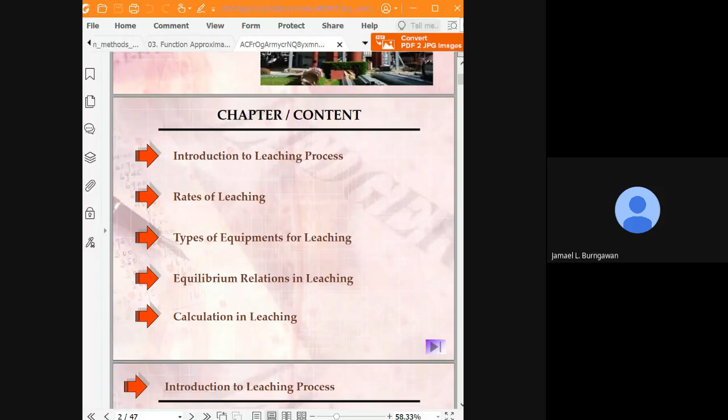Okay. So welcome to the last module for these separation processes natin. No? So as what I've said a while ago, this will be an addition to the previously prepared lectures ko.

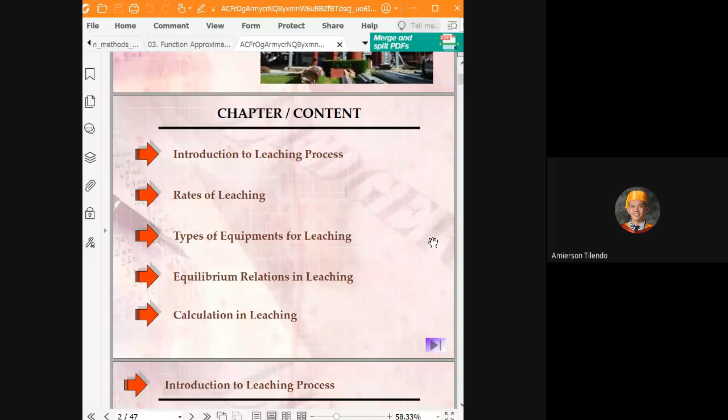So meron tayong liquid-liquid extraction. We also have gas-liquid extraction from the mass transfer natin, which is the absorption. And we have now the solid-liquid extraction, which is also known as leaching. So we will give you an idea on the basics, the fundamentals of the leaching process, the rate of leaching, the type of equipment for leaching, equilibrium relations in leaching, and calculation in leaching.

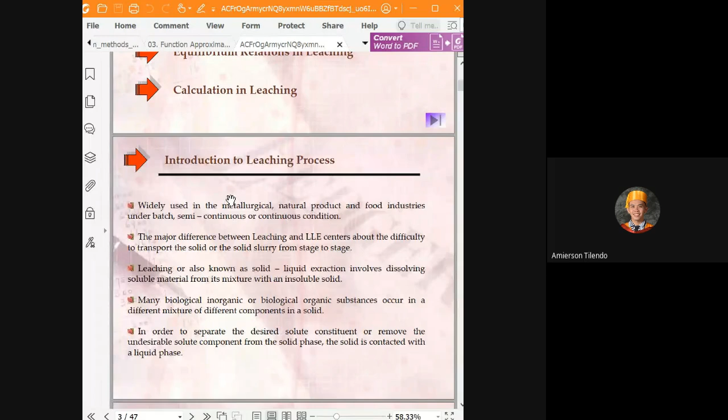So probably the two remaining sessions natin will mostly be covered for the leaching natin before we take our final exam. So it is widely used in metallurgical, natural product, and food industries under batch, semi-continuous, and continuous conditions. So especially most industries na gumagamit ng leaching talaga is the food industries because many products natin, marami tayong products na

I think nawala yung grupo nila. Dito ba yung later pa naman? I think I thought nawala.

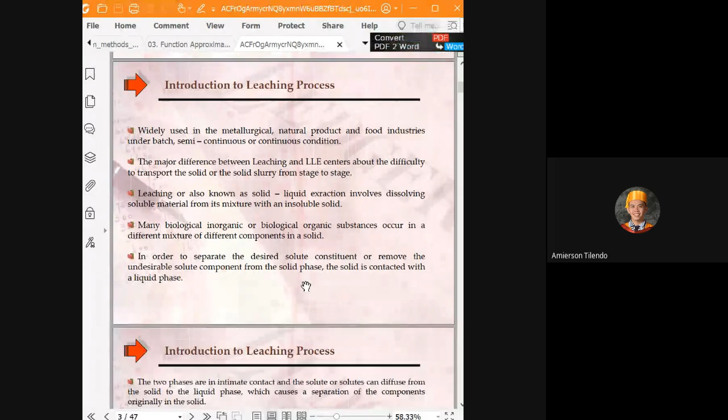Leaching, also known as solid-liquid extraction, involves dissolving soluble material from a mixture with an insoluble solid. So, we have soluble material and the insoluble solid here. Pag sinabi natin soluble material, siya si active component mo, or siya yung gusto mo ipalabas doon sa solid material mo. For example, doon sa tea bag na example natin, yung active component ng tea natin, siya si soluble material kasi solubilize siya sa fresh solvent mo.

Si insoluble material, siya yung matitira doon sa tea bag mo, or siya yung leaves mo na wala ng active component, no? Insoluble, so hindi siya natutunaw na solid. So many biological, inorganic, or organic substances occur in mixtures of different components in a solid. In order to separate the desired solute constituent or remove the undesirable solute component from the solid phase, the solid is contacted with the liquid phase.

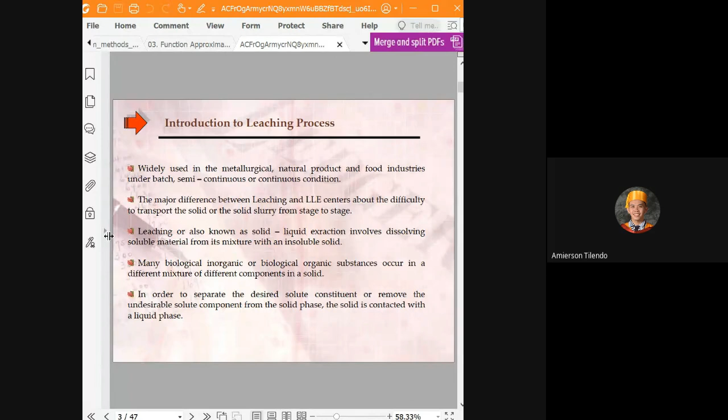So meron tayong example sa leaching process natin if yung soluble material natin is undesirable. So, nili-leach out natin siya papunta sa liquid phase natin. So, two phases are in intimate contact pagdating sa leaching, no? And the solute or solutes can diffuse from the solid to the liquid phase. So, ganito always yung nangyayari pagdating sa leaching, no? From the solid going to the liquid.

Sino yung gumagamit sa inyo ngayon, yung nag-extract ng mga oil sa thesis niya? Or something na nag-extract kayo ng active component from a biological substance? I think meron dito eh. Sige Nash, can you explain nga yung thesis mo?

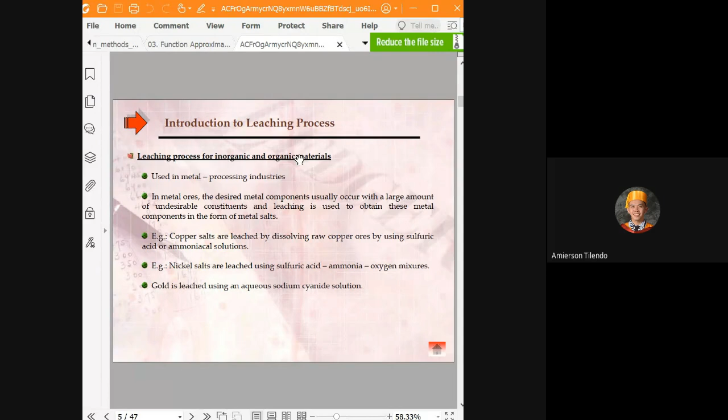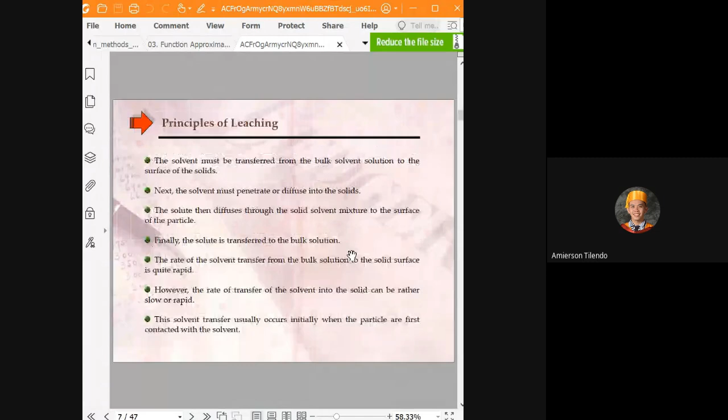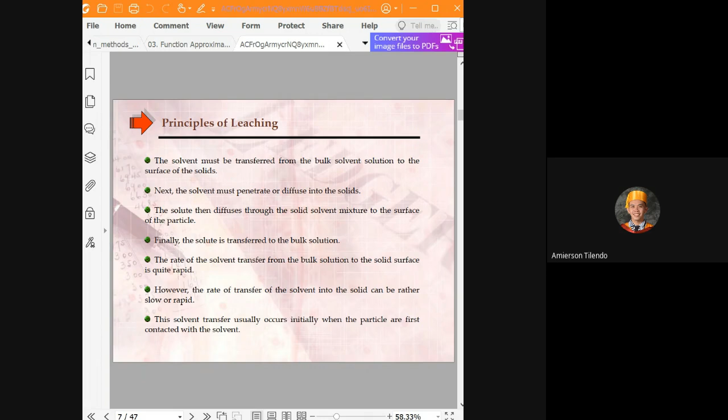And then imagine you have a solvent outside the whole solid. So the first is the solvent is transferred from the bulk solution going to the surface of the solid, which is very fast, especially when your solid is submerged in your liquid solvent. So very fast yun. So we don't really care on the kinetics, or the transport of this first step.

The second step is that the solvent penetrates or diffuses into the solid. So once the solvent is on the surface, it will slowly move into. So ito step number 2, papasok na yung solvent mo, mag-diffuse siya sa loob ng solid mo.

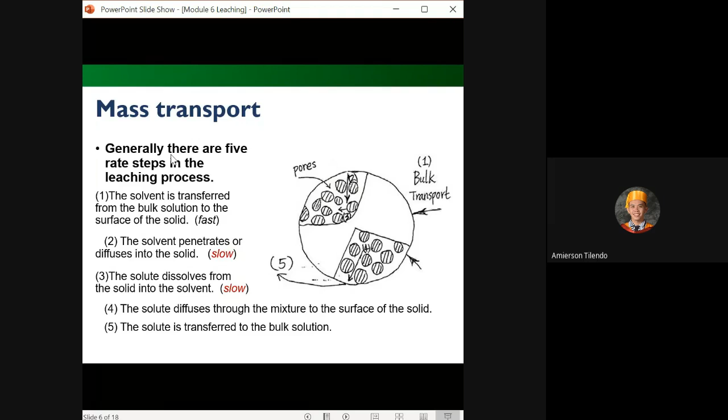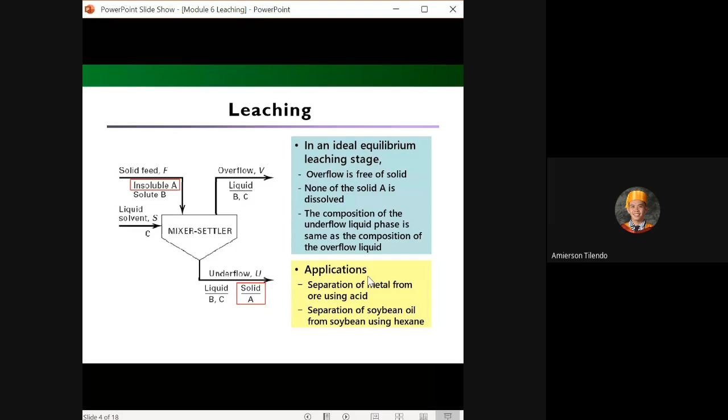You have the solid A, na insoluble. You have the small amount of your C, which is the solvent, and you have your solute B na matitira. So parang mga small amount lang itong si B and C dito. Most probably, sa planta, para siyang pulp na lang dito sa raffinate section sa underflow, or something like a slurry sa underflow natin.

Okay, so generally sa leaching equipment natin we have two types. This is an example of a leaching equipment, so you have an ore column here, and then pinapapump mo ngayon si this is a cyanide solution, and then you have different carbon columns na lalabas dito.

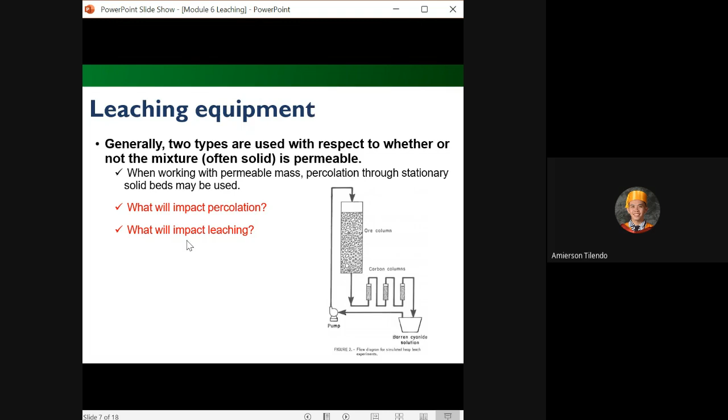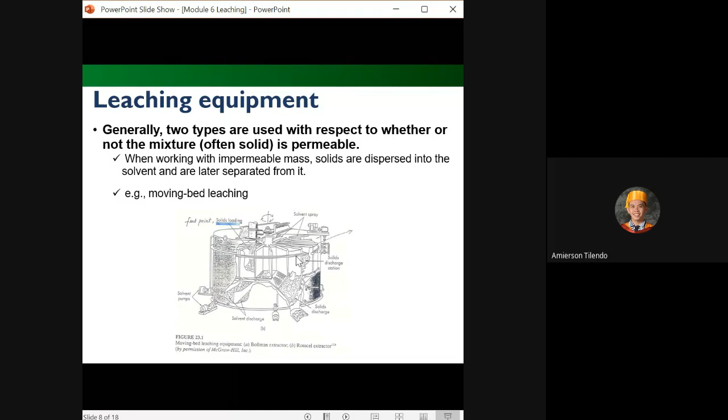This is also an equipment pagdating sa leaching natin, also called the moving bed na leaching natin. So ito is nagro-rotate lang si each of the parang bed natin dito. I think mas maganda yung explanation sa isang slides. Okay, so I'm gonna transfer to the another slides.

So yung mga resistances natin doon sa pag-penetrate and then pag-diffuse outside are very slow, no? So that's why yung leaching takes time talaga. Kailangan pinaparotate muna natin siya, minimix natin muna siya, so on and so forth.

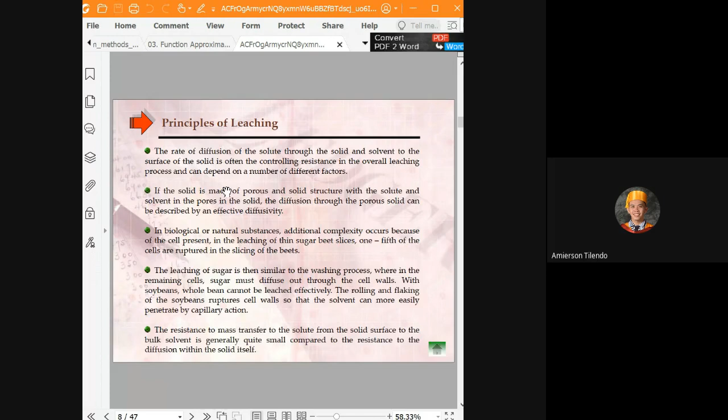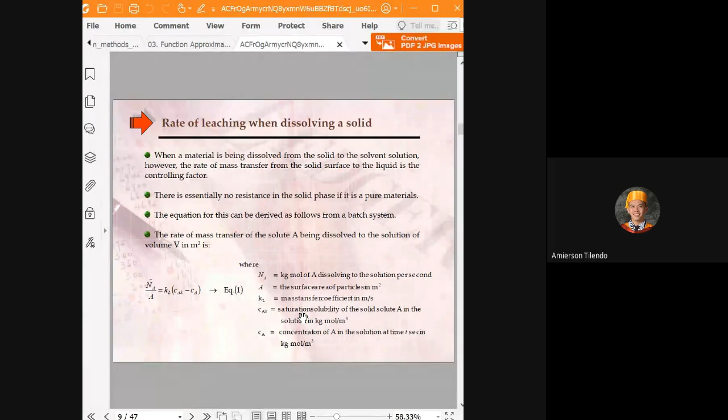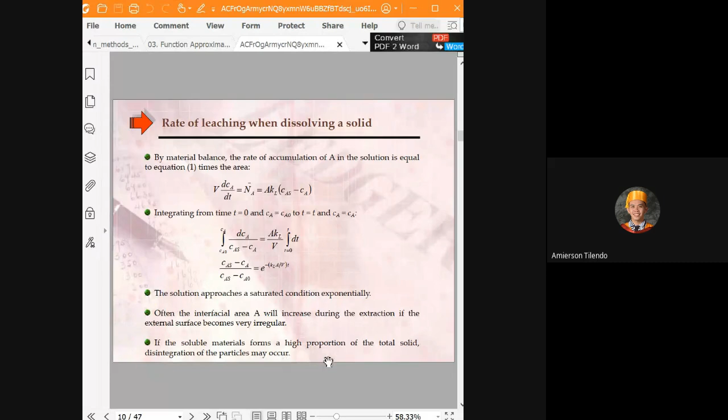So often the interfacial area A here will increase due to the extraction, as the external surface becomes irregular. But most probably our Ca here is constant. So if the soluble materials form a high proportion of the total solid, disintegration of the particles may occur.

So assuming the diffusion in the solid is controlling, that means it's the slowest step. Always, when we say controlling factor or something like this is diffusion controlled process, it means the diffusion is the slowest step. So our controlling step is always the slowest step.

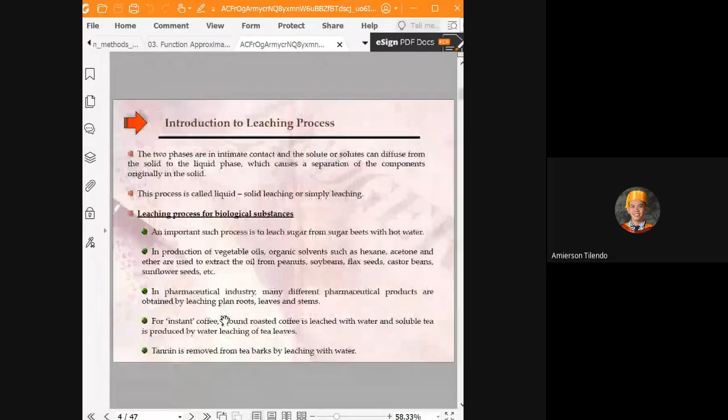And the effective diffusivity is constant. Calculate the time of leaching if the particle is to reduce to 1.5 millimeter. So as with the principle of leaching, once your solute has leached out, the area here often decreases. What I'm saying is that once you've leached out, the area of your solid really decreases.

Let's just say, how do we do this? Let's go back to our tea barks. Once the active component has leached out, since the solute is from the solid itself going to the solvent, your solid shrinks in terms of its area or its volume too. So here, from 2 millimeter going to 1.5 millimeter for our solid, because we are leaching out our solute A.

So for 80% extraction, the fraction here of the unextracted is just 0.2. That means this is the fraction of the solute left remaining in your solid.

So using Figure 5.3-13, I think this is, if I'm not mistaken, in the Geankoplis. Let me find it first. Let's find this table, Figure 5.3-13. So if we have an unextracted fraction of 0.2, the value of the effective diffusivity, T all over A squared, is equal to 0.112, where DAEF is the effective diffusivity, T is our time, and A is the radius in millimeters.

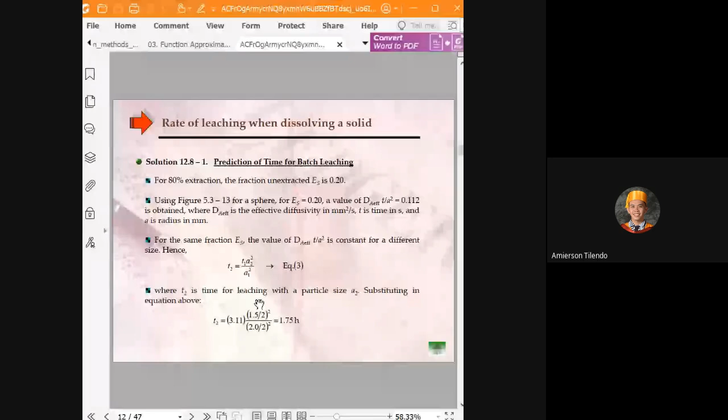Okay, so you need 1.75 hours for the time to leach out or decrease the size into this area, or this radius of 1.5 millimeter. So the 3.11 hours is just a...

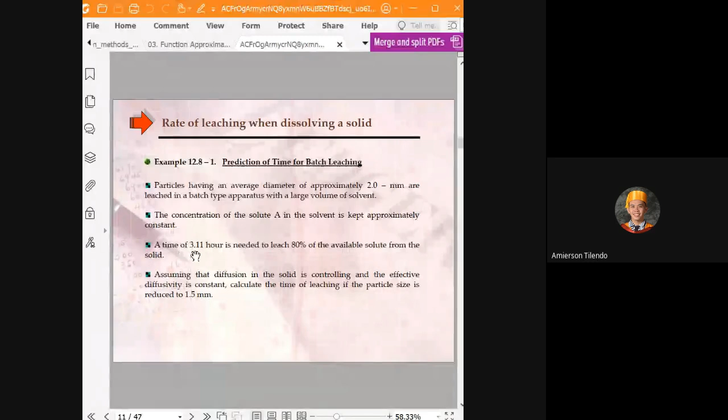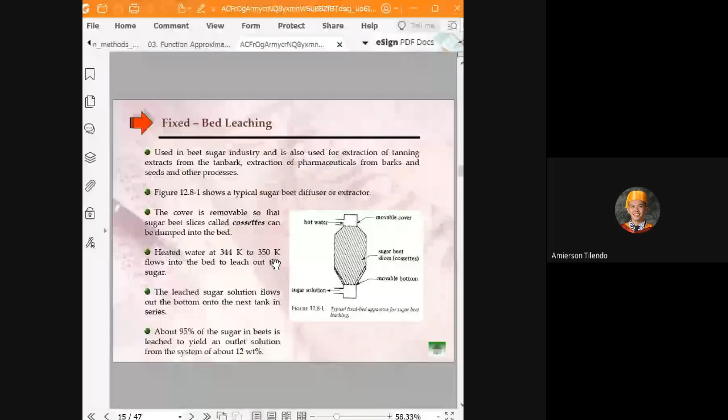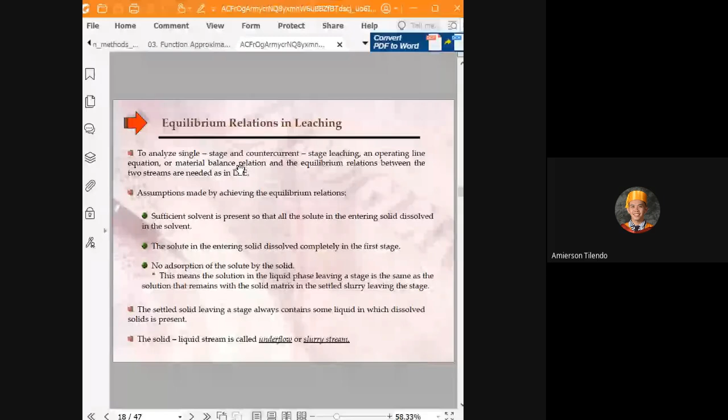We need to know the equilibrium relationships in leaching. So first is to analyze the single stage and countercurrent stage leaching, an operating line equation or material balance relation, and the equilibrium relations between two streams are needed, such as in liquid-liquid extraction.

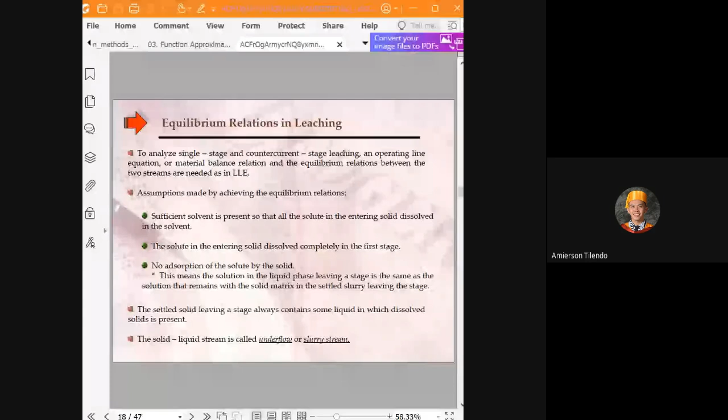As always, our discussion on leaching is just similar to what I discussed in CHE 132. Let me just find it. I'm going to stop presenting and share the entire window.

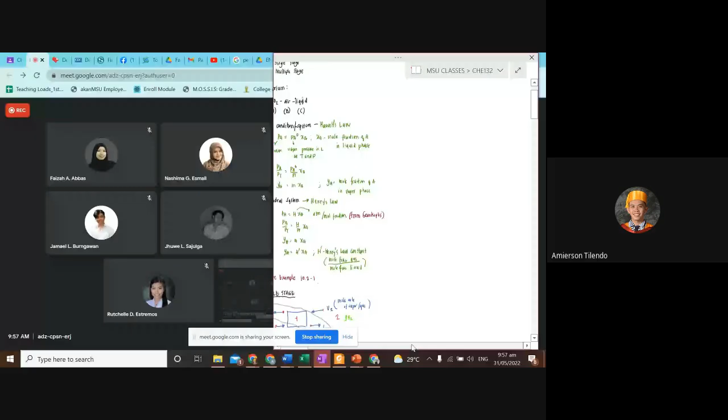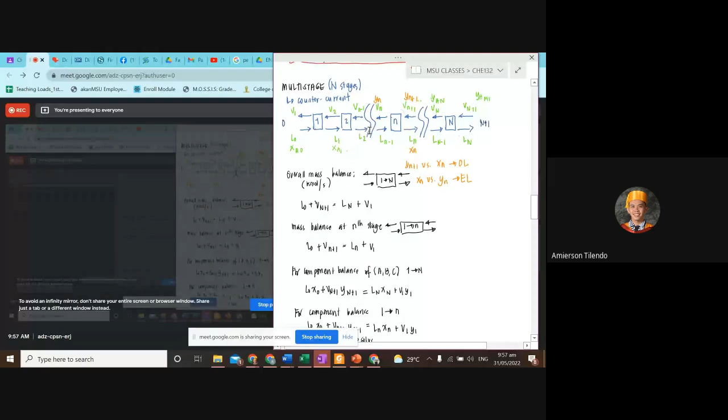Okay, can you still remember our discussion on multi-stage? This is in 132. Remember our discussion that if you have a multi-stage process, we have to find the equilibrium line and the operating line.

So here, for example, we have the underflow L0 going to LN, and the overflow from Vn plus 1 going to V. If we denote small n as the arbitrary number of the stages in between, and capital N as the total number of multi-stages of the cells, the overall mass balance from cell 1 to capital N is equal to L0 plus VN plus 1 coming in, and the leaving is V1 and Ln.

So when we do mass balance, we have a mass balance like this, and we also do the component balance. So we will have an operating line, which is always the relationship between yn plus 1 and xn.

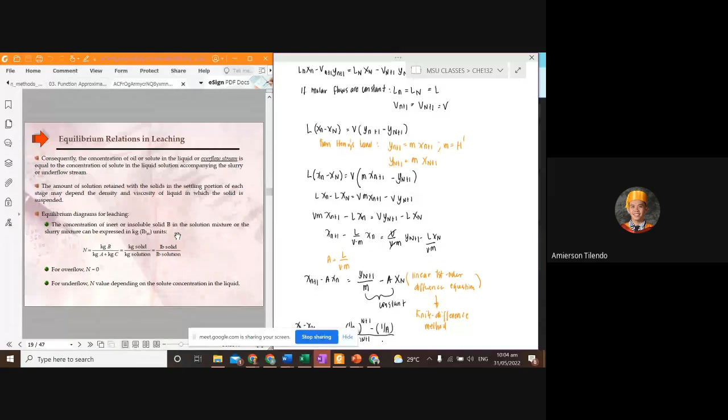So first we have to identify mga notations natin dito. Pag sinabi natin A, for the sake of these slides, siya si solute natin or siya si active component natin or siya yung pinapa-leach natin, solute. A is the solute, B is the insoluble solid, siya yung matitira sa slurry mo, and then C is the solvent.

So the concentration of the inert or insoluble solid B in the solution or in the mixture can be expressed in this notation. So usually N is the concentration. Pagdating sa multiple references naman, nagkakaiba-iba lang din ng notation. So N here is denoted as the concentration, that's kilogram solid over kilogram solution. So yung solid natin is kilogram B, all over kilogram A plus kilogram C of the solution. So take note lang nito.

Sa overflow natin, wala tayong solid na nakikita sa overflow natin, therefore N is equal to 0. For the underflow, N value depends on the solute concentration in the liquid. Kasi at each stage, nag-vary ka ngayon ng kilogram A mo. Nag-vary si kilogram A mo, therefore you have a variation of your N din. So ayun, na-define natin si N.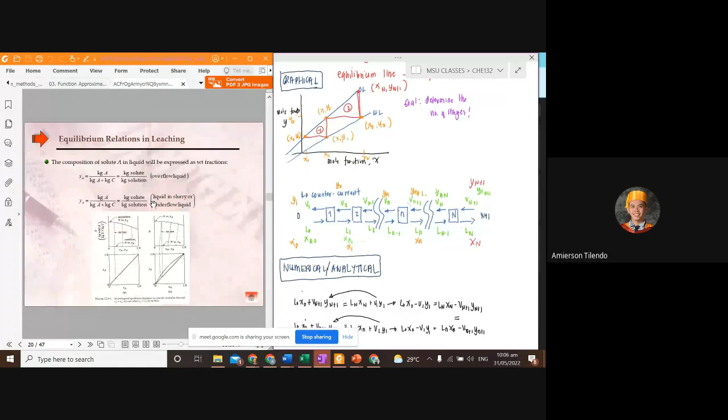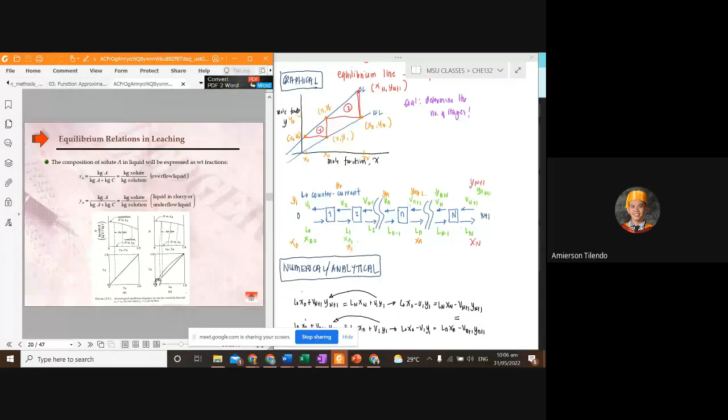This time, i-define natin si composition of solute A in liquid, which is expressed in weight fraction. So here we have the expression of B, si A naman dito. So we define XA. Actually, this diagram is in Geankoplis. Papalakihin ko lang.

So we defined XA as kilogram A over kilogram A plus kilogram C, or kilogram solute over kilogram solution in the overflow liquid. So yung sa taas is X, yung lahat ng overflow natin, XA. Yung sa baba naman natin is YA, or kilogram solute over kilogram solution, where the solution is equal to A plus C. Always ang solution natin is the active component plus the solvent. Okay, X is the overflow, Y is the underflow.

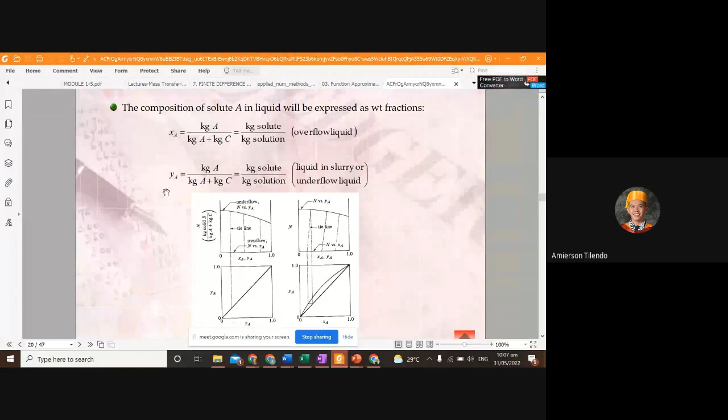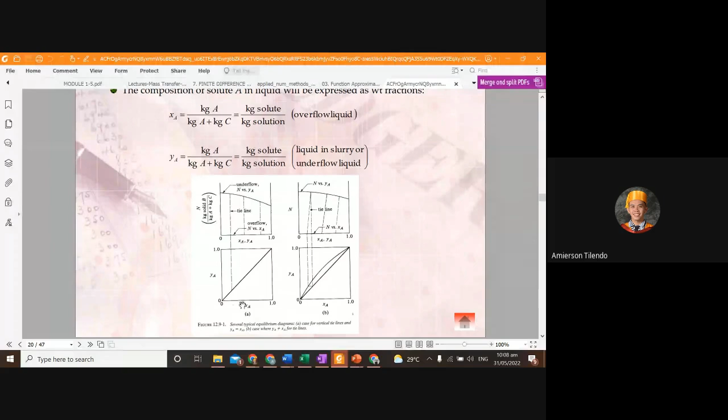So dun sa kabila na. So this is a typical equilibrium diagram natin. We have here vertical lines. Anyway, ipapakita natin ito later part, kung paano natin ito ginagawa. So you have the calculation in leaching. Now we have the single stage leaching and countercurrent multi-stage leaching.

So in a single stage leaching natin, imagine this is a single stage natin. Similarly doon sa kung paano tayo gagawa ng equilibrium stage natin. Now here we have a feed slurry coming in. So si feed natin, andun si insoluble natin, which is B, and we have the active component natin. And then meron tayong solvent feed dito. Naka-counter siya, papasok si solvent feed mo. And then mag-mix ka, at the same time settle ka para meron kang underflow solution and overflow solution.

So we just have to take note of the different notation here. Magsimula tayo sa taas. The V, remember yung notation natin guys ha? Si arrowhead is kung saan siya papunta, and the tail is kung saan siya galing. For example, here, ang pangalan ng stream na to is L0 kasi galing siya sa zeroth stage. Ito is the first stage, so we denote this as 1. So ito, stream galing siya from zeroth stage, so L0 siya. Here naman, imagine we have 0, 1, and 2. Just wait.

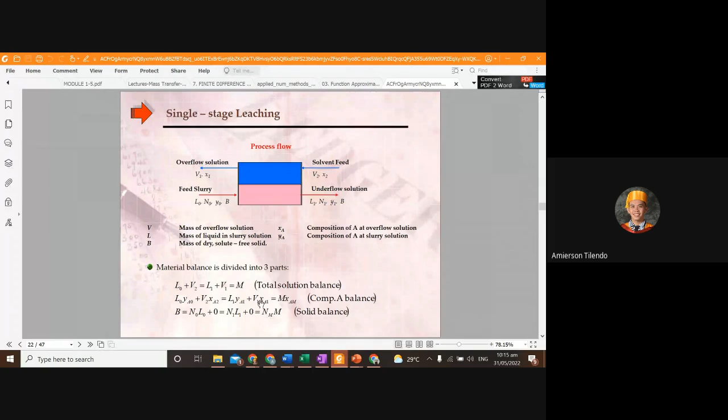And then we have the component balance here. Sa component balance, we're talking about the A. Nagko-component balance tayo sa A natin. And then we have the solid balance, the B, which is N0. And here, yung N natin is the composition of your solid in the feed slurry. So N0 times L0 plus 0 is equal to N1 times L1 plus 0, kasi 0 naman sa taas, is equal to N sub M times M. So these are the three balances na kailangan natin ma-determine at the beginning.

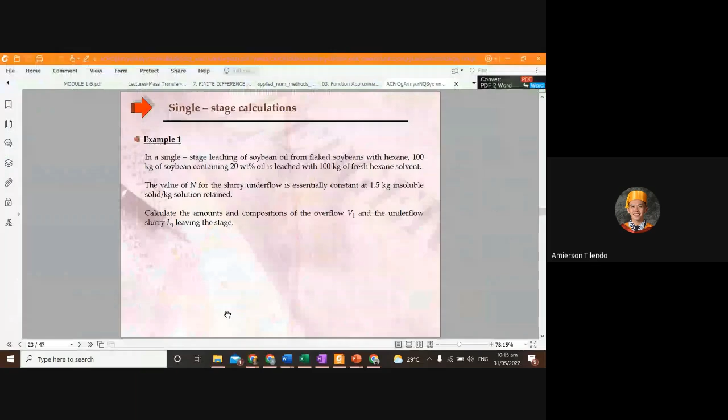Okay, can you please copy lang muna itong single stage, and then I'll be back in like 5 minutes lang. Okay lang ba? Kindly draw your own single stage calculation na lang, and then label kung saan si underflow, saan si overflow, and the rest of the given. Paki-label na lang. Okay ba? I'll be back in 5 minutes. Can you hear me? Yes, sir. Sige, sige. Please internalize this problem lang.